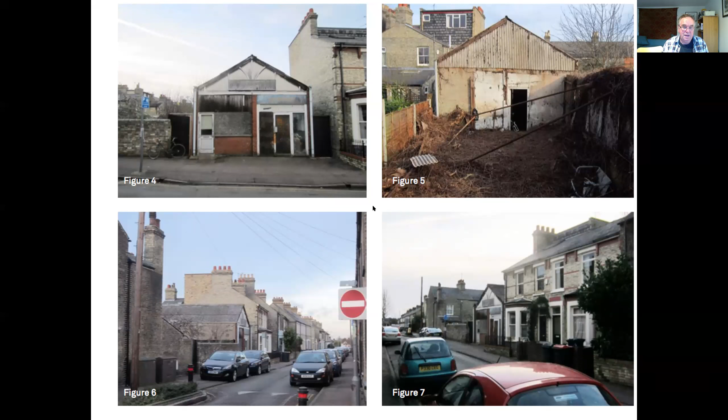What was in the garden at the time we purchased was nothing more than an overgrown rubbish tip. The only condition placed on the sale by the vendor was that we should build an eco house. The vendor assessed the bids and we won through on the basis of my long-term interest in energy efficient housing. Just what an eco house meant in practice was left open, and just what we would build was something that had yet to take shape in our minds.

One of the complexities I hadn't bargained for was that this area of Romsey Town had recently become a conservation area. And whilst the conservation department weren't wanting us to save the building - there really wasn't much to save - they did want to see what we planned to put in its place before demolition would be consented.

I had hoped to do it the other way around - demolish, clear the site, then survey and plan a course of action. Now, I may know a bit about the building process, but I'm no designer, and this was never going to be a straightforward house. So it was obvious that we required some professional help here. We needed an architect on board, much earlier in the process than I'd hoped for originally.

We did a few inquiries and we quickly settled on Mole, the practice run by Meredith Bowles, who I'd known for some time and whose work I really like. They'd recently moved their office into Cambridge, and this added to the attraction.

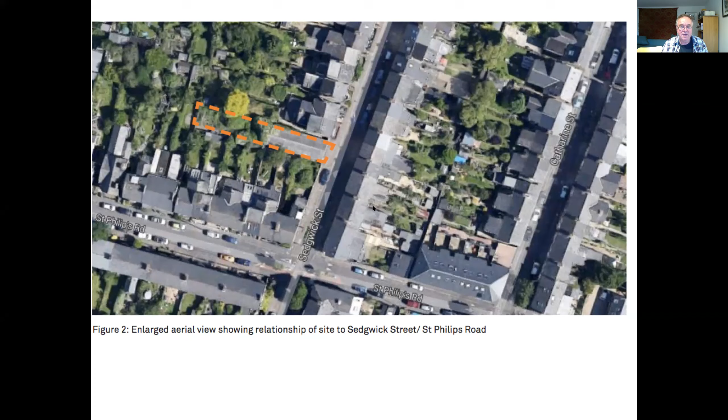Now, the architect started by looking at the surprisingly wide variety of styles in the neighbourhood. You think of Romsey as being all terraced houses, but in fact there's a lot of different houses around there. We particularly liked Argyle House, the top left-hand corner, number 1, which happens to be located right around the corner in St Philip's Road. It was the first house to be built in this part of town, and ours would probably be the last, so somehow we felt a connection with it.

We also noticed that, like the warehouse we were replacing, it was a gable on to the street. We played with all manner of ideas earlier about what we might like to do with this thing, and we quite liked the top one, which we nicknamed the ziggurat.

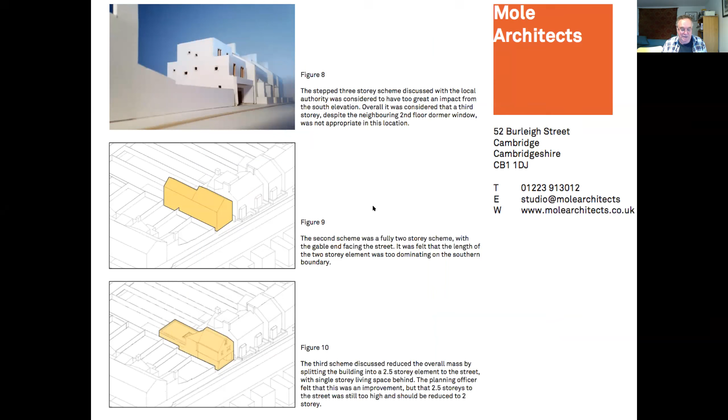Well, let's render it, they said, and see what it looks like, let's get a better idea. And that's what it turned out on render. Stunning looking place, but somehow it didn't really fit with Romsey, and we ended up rejecting it - a bit too Yemeni for Romsey, really.

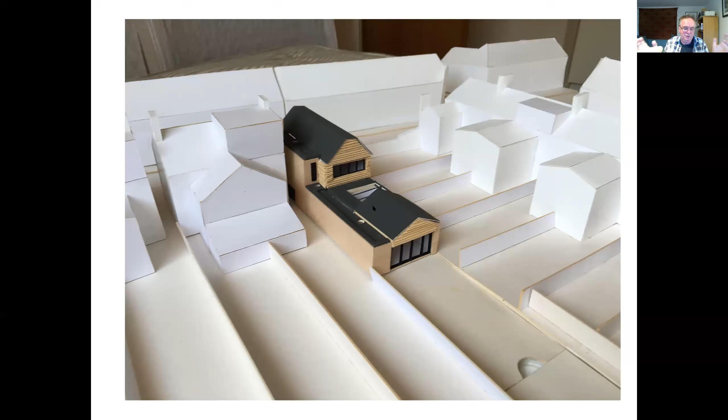We ploughed on through more iterations. Eventually we hit on a form that everyone seemed comfortable with. It's not an easy, simple shape, but this is because we had to keep two things in mind. Firstly, we couldn't overpower the seven homes on the south side, on St Philip's Road, that adjoined our plot, and this accounts for the flattened main roof on the gable end, on the top of the ridge.

Secondly, we couldn't block light from our neighbours on this side, so this accounts for the lower back and the strange section in the middle where we're getting light into the building.

Now, this model was used to show to the neighbours at an open warehouse event, and we also used it in the planning meeting where our project won permission with full support of the planning committee. It wasn't actually a controversial application, but it was a lengthy, complicated process - it took about the best part of 18 months to get there, and we ended up with 18 planning conditions, many of which had to be satisfied before we could start building.

I'm now going to attempt to go into a bit of video, so hopefully the gods are with us. We'll get through about a minute of a video and we'll have a walkthrough of the house. Not that one, we won't. Let's try again.

Here we go. This is the walk down Sedgwick Street, away from Mill Road, and you see our house on the left and how it fits size-wise, gable on with the terraced housing around it. Draw your attention to the zinc roof facing on the south side with the inset solar panels and the two veluxes lighting the first floor bathroom.

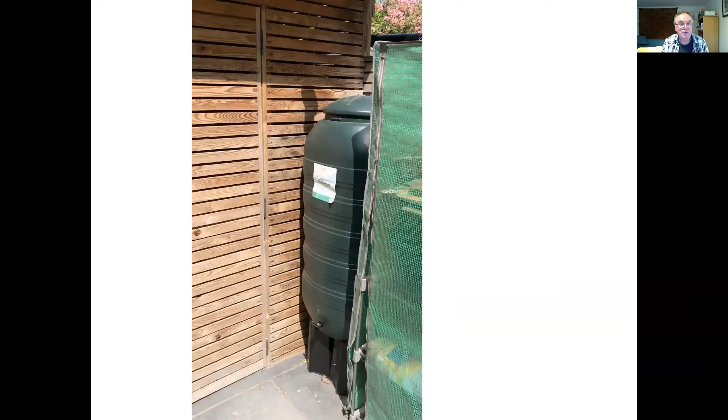Finally, as you come across to the studio at the back where I'm speaking from now, where I work, and swing round, you look at the back of the house, and you get the two rear gables featuring the louvered cedar.

That's the end of my first part of the talk. Any questions on that so far?

Well, I haven't found any questions. I haven't found any questions so far. If anybody does have anything they wish to raise on this particular point, there was Guy down here a moment ago.

Well, the width of the whole plot is 6 metres wide, almost exactly within 10 mil, and it goes right the way - the whole thing is 40 metres deep. It's exactly the same size as all the other houses when they were laid out in the 1890s. The question is, why was it never built on in the first place? I suspect the history of it is that when the builders were building Sedgwick Street and Cavendish Road and the roads around here, they used to keep the odd plot back for maybe making lime and storing their materials, and it just never really got built. There was a similar unbuilt plot on the next street.

So it was actually set out at exactly the same size as all the other plots. We really bought a plot, and the warehouse appeared in the 1940s. It was built very interesting, just some loose and poured concrete - they didn't have blocks. It was poured with shuttering, and then the roof was a steel cage with asbestos sheeting on it, in very poor condition.

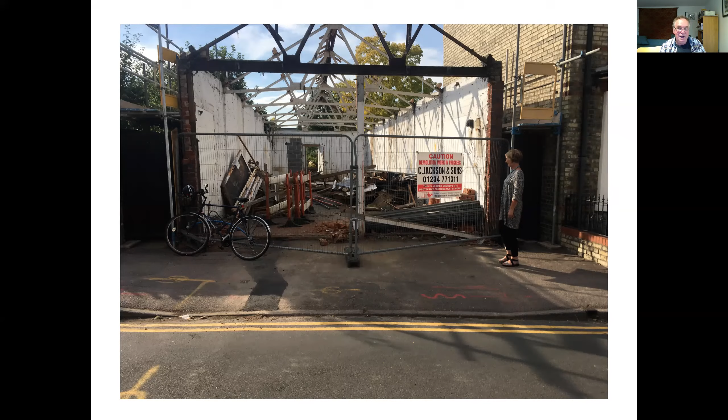After a week, we had something approaching what I'd wanted 18 months earlier - a clear site. But this time we had a plan, and we had planning permission, albeit with many conditions.

One condition was that we had to investigate the contaminated land, because we're developing a brownfield site. This introduced a new delay of about 4 months, during which we drilled holes, sent samples off for analysis, then waited and waited, only to discover there was rather more heavy metals present than we'd expected. So we had to excavate deeper, and then introduce some certified clean soil - that lovely red stuff you see in Bedfordshire, complete with Brussels sprout seeds, which proceeded to pop up during the course of the build.

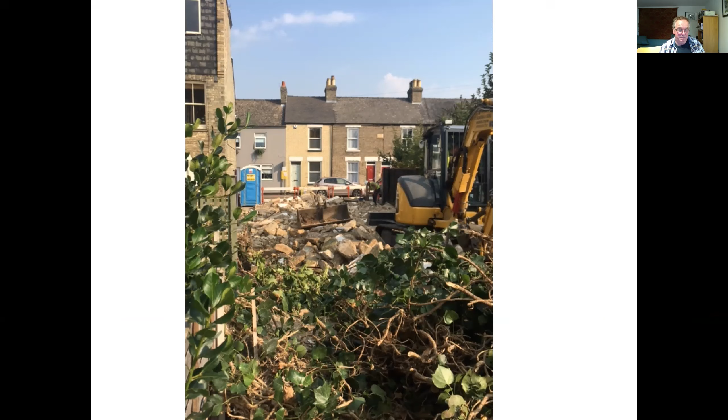It was November that year before we could start building. Because of the restricted access, we had to start at the back and work forward. So the garden studio, done by MySpace in Norfolk Street, was the first thing we built, followed by the fencing, and then we had to find a home in the garden for 12,000 bricks and 14 tons of sand. This is quite a considerable process in itself.

During this time, Mole - this is Meredith Bowles, the main man - they were working on the detailed technical drawings for the finish of the house, helping us as we worked through the pre-commencement planning details. This was the brick panel we showed to the planners just before inspection. All the while we were liaising with Potton, who we'd chosen to build the SIPS panel superstructure.

In April 2017, we finally got underway on the main house. Here are some action shots of the groundworks. I was there every day, cycling over from Chesterton, pausing to get married to Mandy at the Cambridge Union on my 64th birthday. Our honeymoon was 4 nights in Italy, and then we were back on site.

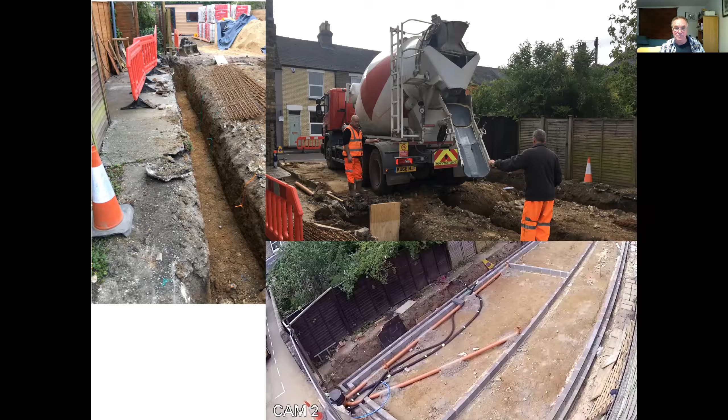Now the house is designed to use very little energy, but it's not quite a passive house, which is widely regarded as the gold standard for low energy housing. Well, why not? Passive house is essentially a recipe for designing low energy homes. To have a passive house, you've got to have lots of insulation, triple glazing, it must be airtight, it must have few, if any, thermal bridges. And it also requires mechanical ventilation. It's very much an engineering solution to the issue of what an eco house might or might not be.

There are lots of numbers, huge spreadsheets to work through to get to all the levels required. The thing is, it works, but it's much easier on some houses than others, and ours presented a couple of problems.

We had restricted width, as I already mentioned, just 6 metres. So the extra insulation was at the expense of internal room sizes, which was an issue because the only room at the back of the house is spoiled for space. Everywhere else we were constricted by the passageway and the staircases.

Because of the close proximity to our neighbours, remember the planning model, we had a very complicated form, no less than 19 external surfaces against an optimal 7. So the form factor's not very good. The whole structure is not very optimal in terms of trying to do a passive house.

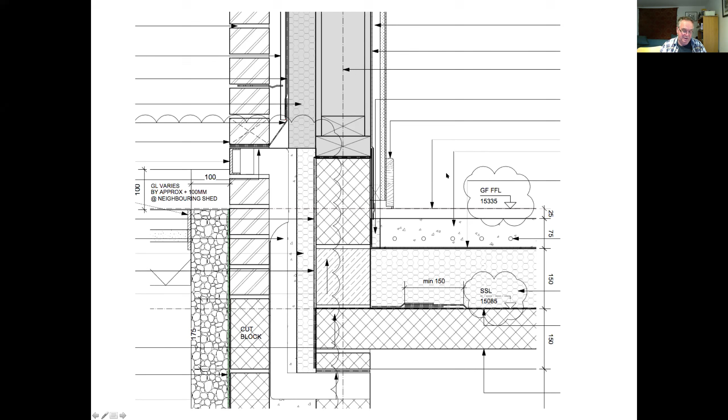We were lucky that although Sedgwick Street is one way, there is actually a bypass route around through Wetton Hall Road, and we were able to close it off for 2 hours while traffic still got through. It was just pure luck that we ended up there. If we'd been on the next block, we'd have been stuck, but there was actually a route around the constriction of having a lorry there for 2 hours.

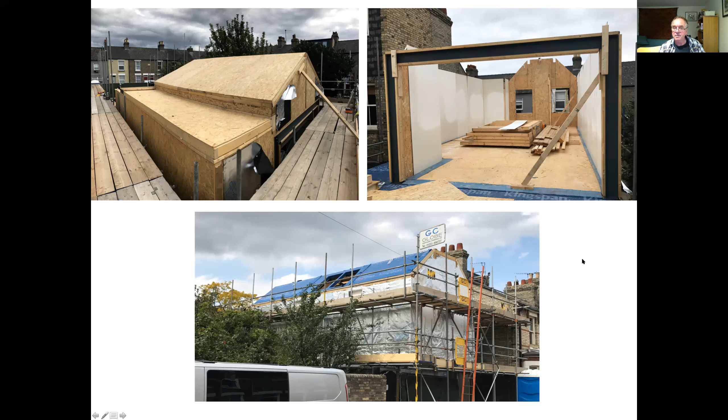It's an amazing process. It took about 2.5 hours to screed the whole ground floor. I'd not worked with it before and was really impressed by it.

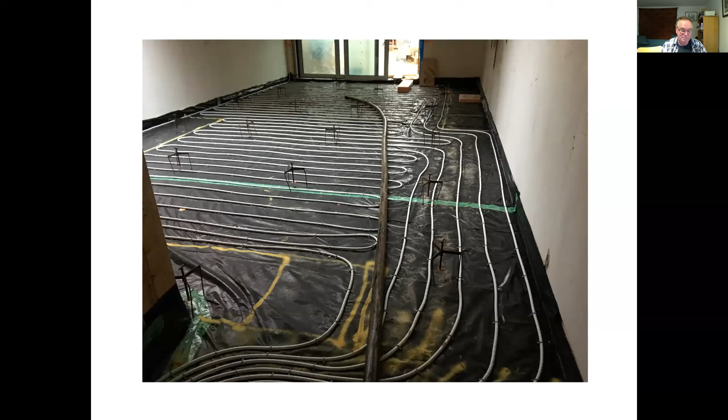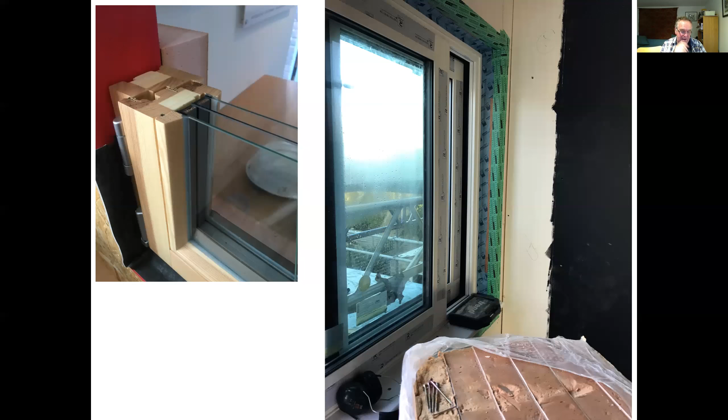Talking of air tightness, it's worth discussing that we had a blower door test, which is one of the keys for passive house construction. It's one of the few qualities of a building that you can actually measure on site. We did a blower door test twice, once at this stage and once on completion. To do this, you put the interior under a low pressure, 50 pascals, and then measure the flow rate required to hold that pressure.

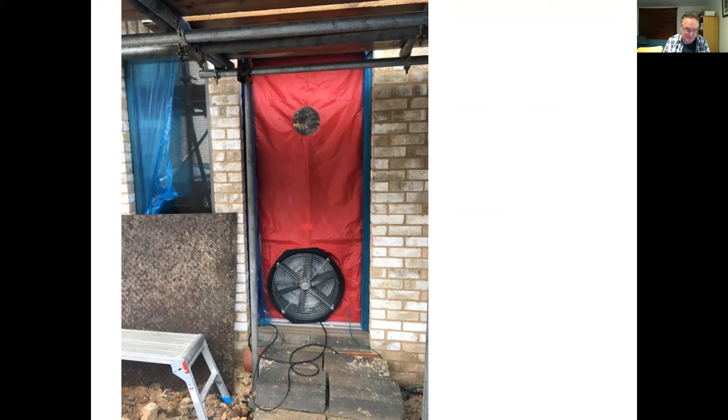From this, you derive the air tightness score. Passive house looks for a score of 0.6 air changes per hour. Our final score was 1.0. That may sound like abject failure, but bear in mind the average new build house scores somewhere between 5 and 10, and the proposed building regulations target for 2025 is only 8. So we're 8 times better than this. I think it says more about the failure of our building regs than it does about the standards we achieved here.

But one of the features I want you to know is that we use the gas boiler to heat the underfloor heating and the hot water. That, in retrospect, was our biggest mistake. We should have installed a heat pump.

Now, our design brief had emphasised the so-called fabric first approach. This eschews green bling like heat pumps and solar panels in favour of spending money on insulation, glazing and airtightness. Having done all this, you simply don't need to spend good money on heat pumps because you reduce the demand for energy so much that any energy you do consume is infinitesimally small. Whilst that may not be quite true, it does pretty well summarise my thinking back in 2015-16 when we were formulating the plans.

There was also the fact that back then electricity was still a pretty dirty form of fuel, far worse in terms of carbon emissions than mains gas. So in our quest to reduce carbon emissions, which we were very keen to do, there was logic in fitting a gas boiler. But 4 years on, due in large part to the dramatic growth of North Sea wind farms, the carbon intensity of electricity is now usually less than gas.

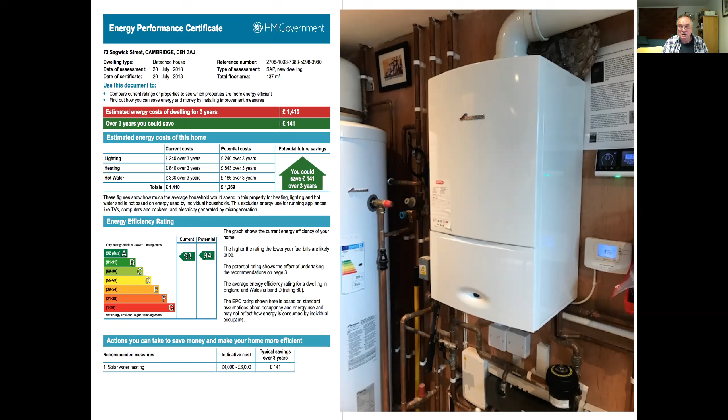Is it successful? In a good month, it certainly is. It diverts something like 100 kilowatt hours into the tank, enough for about half our hot water use. If we had the full 16 PV panels, the diverter would deliver the same heat energy as solar thermal panels for much less price.

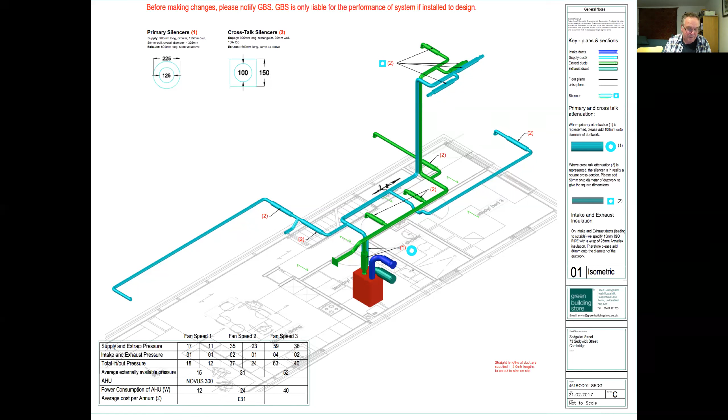It's worth also noting that it formed part of Potton's design. There are 2 steels going through the house at that level, and we had to pre-drill holes to get the pipe through. It's not something you can do as an afterthought - very much central to the creation of the house.

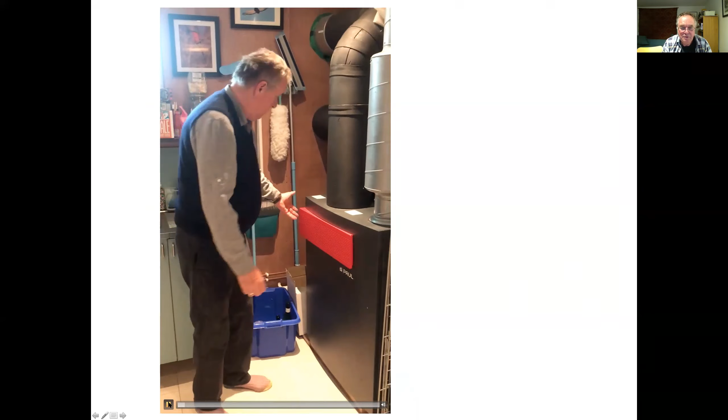I'm going to finish with hopefully another video sequence of me working the filter on this, the heat recovery unit of Paul Novus. In there are two filters, one on the inlet and one on the outlet. This is the inlet filter.

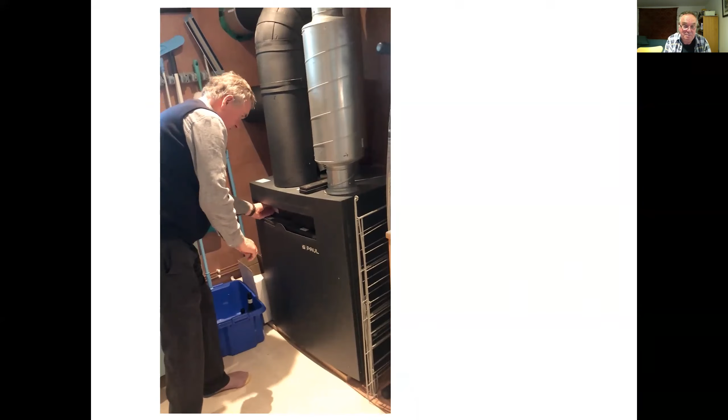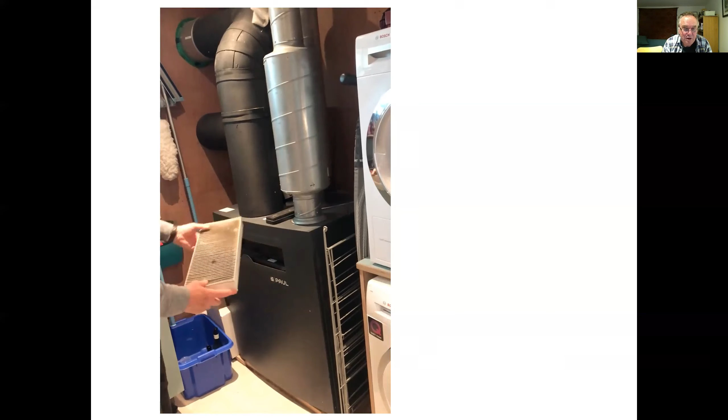After about the first 4 months of the pandemic, it went in as a brand new white filter, and that's what it took out of the atmosphere. So there's a lot of pollen in there. Who knows, there may even be some old COVID in there, but it certainly keeps the house fresh and filtered.

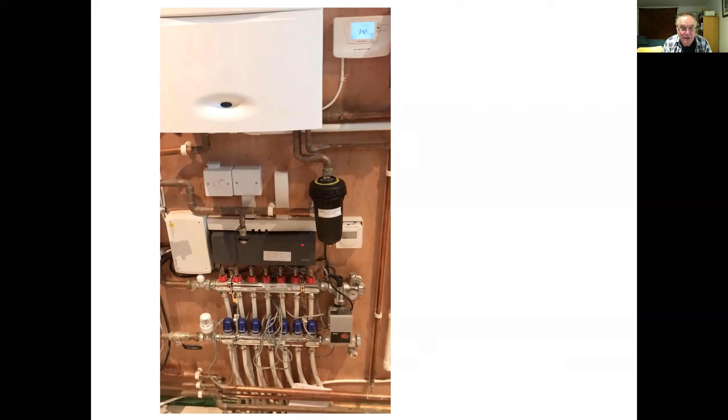And you change that every 6 months or so. Looking around the rest of the utility room, there's the fuse box, the boiler down below it, the manifolds for the underfloor heating, and finally the oversized mains pressure cylinder, which stores 230 litres of water, and we use that really as a heat battery, so we can get a lot of solar heat into it and store it. It's probably 2 or 3 days worth of hot water use.

That concludes the section on the energy use and the theory behind why we built the house that way. So, any more questions at this point?

Well, we have several from Wendy B, who's unmuted or should be unmuted, and she's asking some questions on contractors and also about finish on the flat roofs, which probably fits in with what you've been talking about. So, are you okay to talk, Wendy? Yeah, absolutely. Can you hear me? Yes. Yep. Wonderful. Yeah, there was a couple of questions.

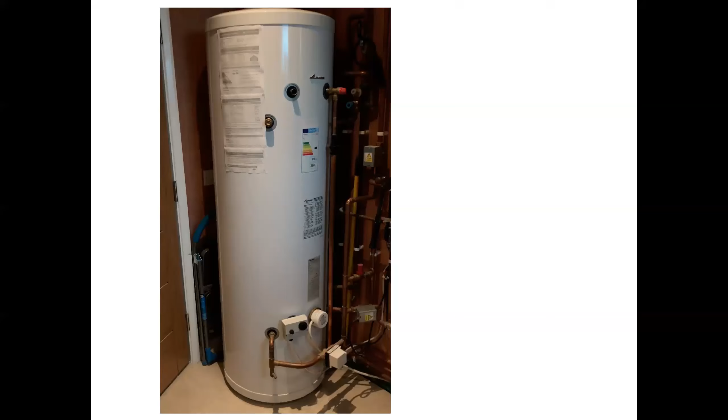I'm really interested in what material you use on your flat roofs. I inherently don't like flat roofs, but I just wondered from a wear and tear perspective what you used. It's Trocal, which is one of these single ply membranes.

I've forgotten, it's very similar to Sarnafil. In fact, owned by the same company as Sarnafil, which is probably the market leader in this area. So it's not like a rubber? No, it's not the rubber ones. They're a plasticized membrane. It's neither a felt nor a rubber, it's really a molded plastic. It's stuck down and welded together, heat sealed at the joints, and it's very good for doing fiddly little details around edges. It has a lifespan of around 30 years, and it is repairable.

I'd never worked with it before. I hadn't built for 25, 30 years before doing this house. I used to be an active builder back in the 80s and 90s, and we were quite happy using 3-ply felt. That was it. Since then, the choices in the market have grown more complicated. So Trocal was done, the white roofing were our contractors, and they steered us down that route. We were happy to use it, and so far it's been fine.

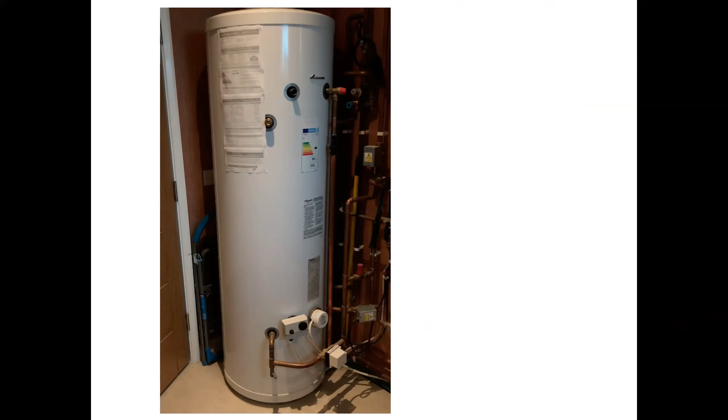Or they want it smaller, but smaller doesn't work when I'm trying to accommodate my parents. Well, then you're more or less in the hands of the planning inspector now, aren't you?

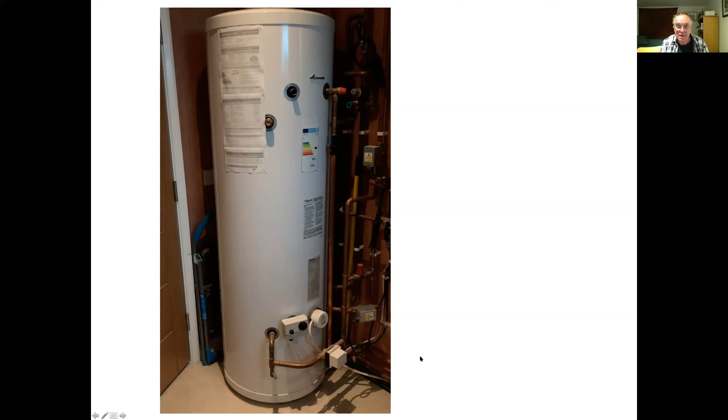I'd never seen it before, but Mole had practiced hands at it. I said to Meredith that one of my pet hates was panels of cedar cladding affixed to walls at great height in order to say something sustainable—quite what, I'm not sure. But they discolour within months and frequently look very awful very quickly. Why not produce a feature that doesn't discolour and improves with age?

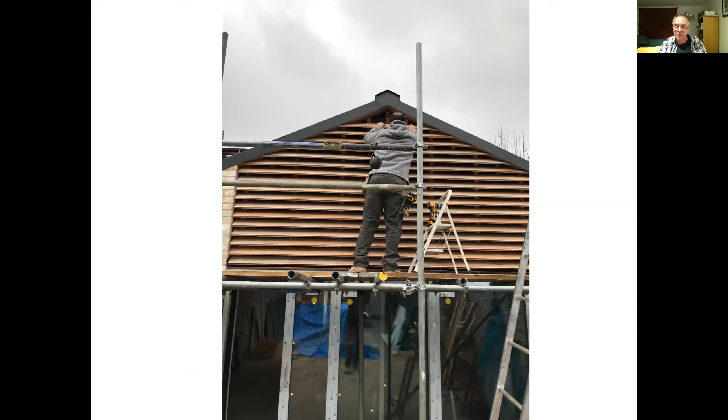This is Duncan Dodd's Artisan Structures, our master carpenter, finishing the rear gable. You can see what a fiddle it was to get that in with all the different angles at work, and we're very pleased with how it turned out. The shadow gap on the front elevation, which you get a good view of here, was also his work. Very skilled craftsmen—they took the architect's designs and ran with them.

I haven't really mentioned my role in building the house, and it seemed like a good point to explain it. I acted as the main contractor, hiring in trades as and when required. The superstructure, the panels, were built and erected by Potton Homes with very little input from me, but they handed over the site, and from then on I was responsible for organising it to completion. That's a pretty common self-build route to take, especially when you're using a factory-built superstructure.

Self-build takes many forms, from people undertaking the vast bulk of work themselves, to getting a custom home builder to undertake the entire project on your behalf. The crucial factor is that the self-builder is the one paying the bills throughout, and that differentiates them from speculative builders who build to sell on.

From my previous experience I've got a few contacts in the building trade, having been active in the 80s and 90s, but almost everyone working on the site was new to me, and as so often happens, they introduced me to mates who then introduced me to other mates. Maybe I was lucky, but the standards were pretty high, with very few exceptions, and the costs were pretty fair, I thought. Much of the later works were paid for on a day rate basis, the going rate being about £200 a day for skilled tradesmen. Everybody working for me delivered a fair day's work, and some, like Duncan, were verging on the inspired.

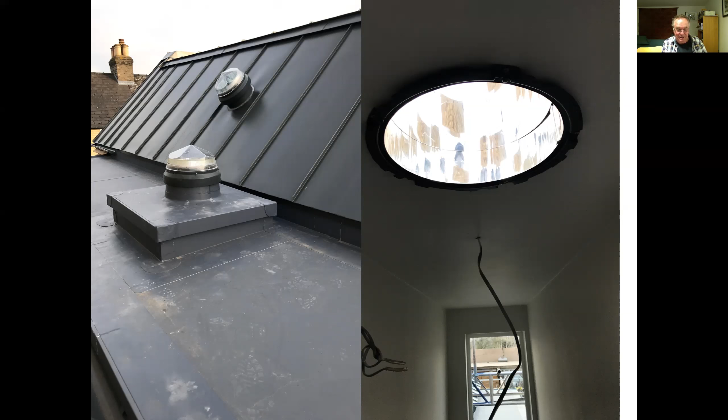This is the windowless upstairs cloakroom lit by the angled sun pipe. I love this photo because it's all about the daylight streaming in from above. You realise that daylight is of itself very important to the quality of the space. Now, the daylight sometimes clashes with energy efficiency, so be it. Sometimes daylight has to win. Actually, I don't think the energy performance of these sun pipes is too bad, although it's hard to get good data on this point.